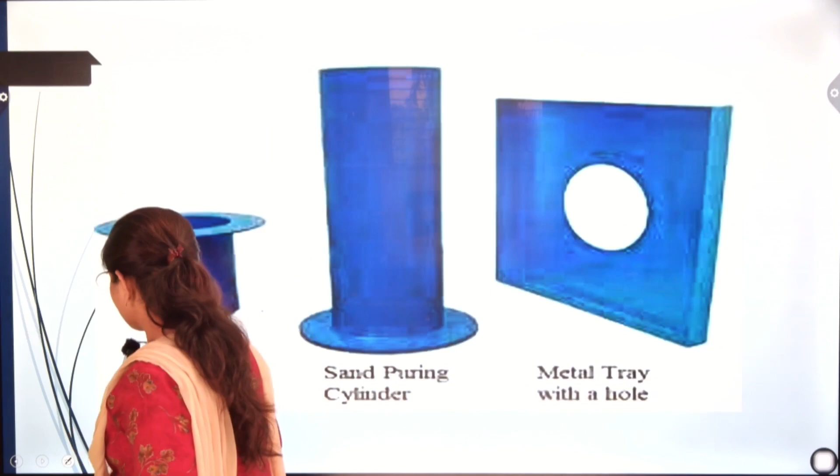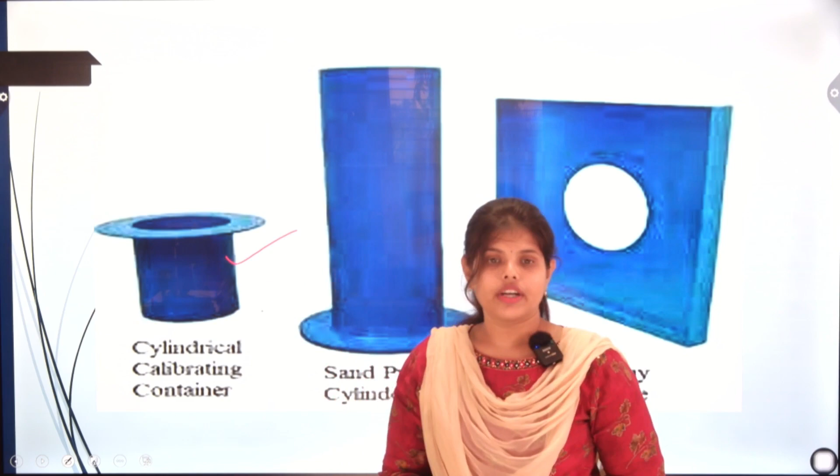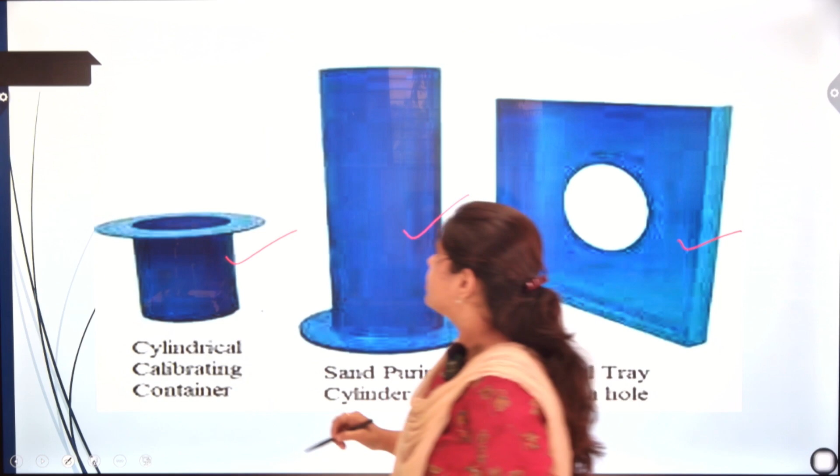To conduct sand replacement method, we need three apparatus. First is the cylindrical calibrating container. Another is the sand pouring cylinder. Next one is the metal tray with a hole. Also we need one spatula, and that's all. Now we will learn how to use these to conduct the sand replacement method.

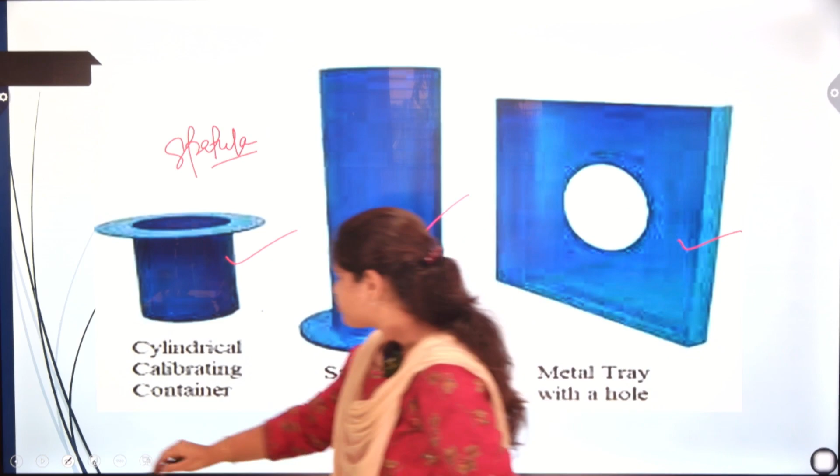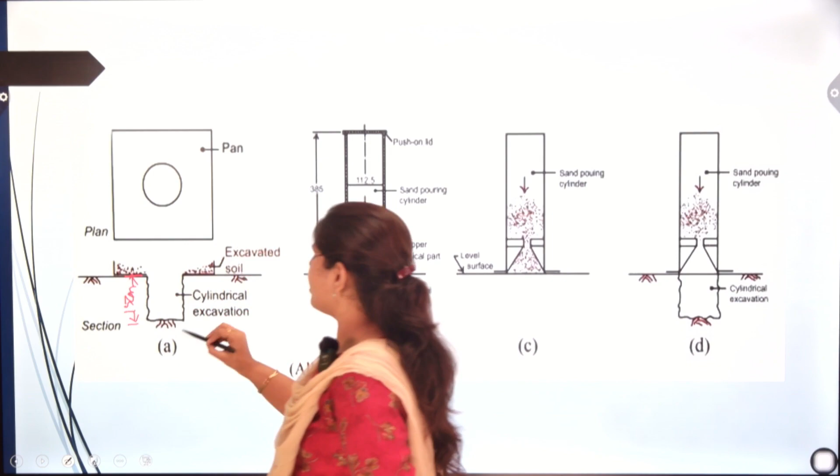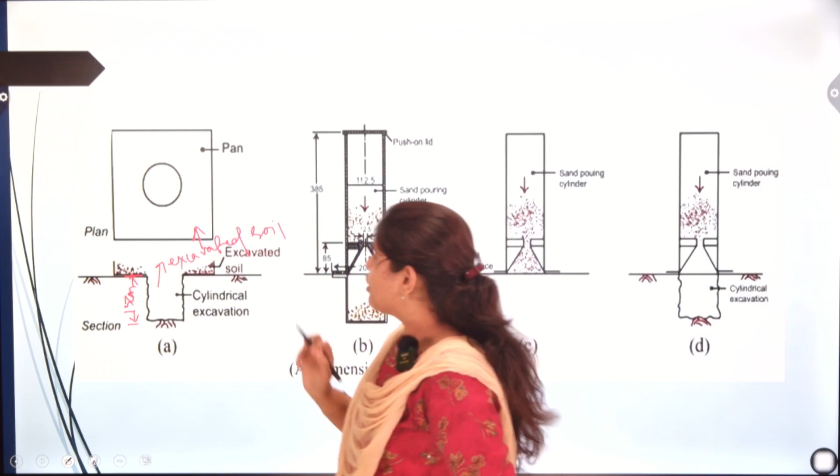First we will take the metallic plate and conduct soil excavation. This soil excavation will be done up to 15 centimeters. We will excavate this soil up to 15 centimeters, then take this excavated soil and put it into the metallic plate. Now this metallic plate will be filled with soil and we will take that as W2.

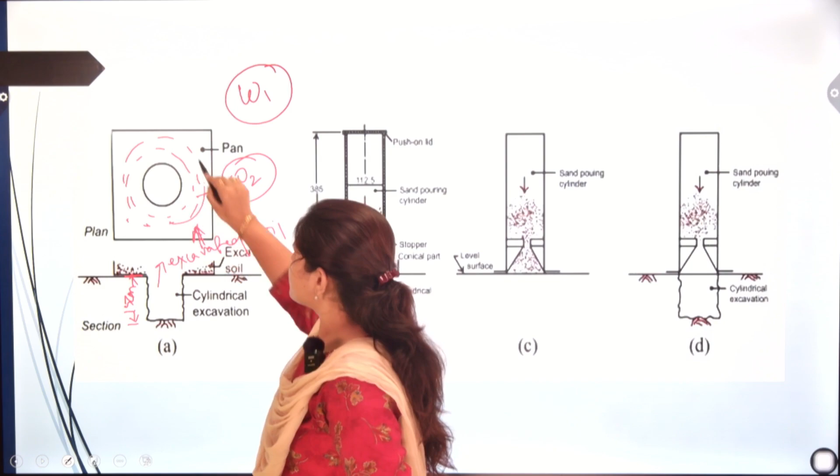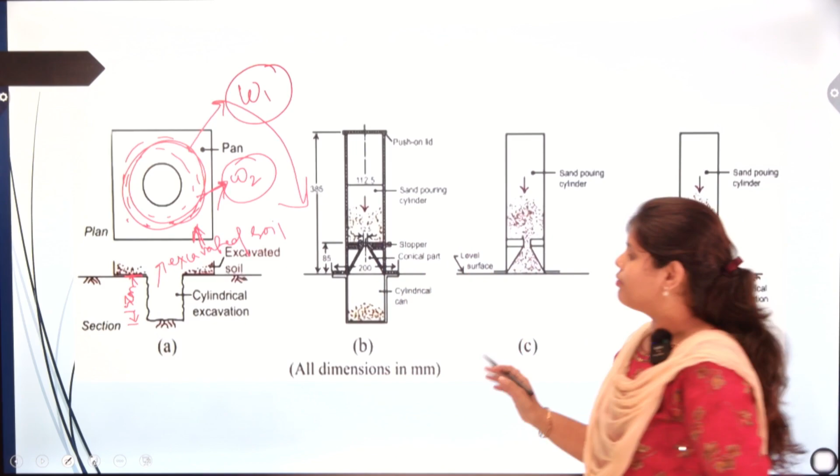So what is our W1? Till now we have taken the soil and weighed it, and the weight becomes W2. So to know W1, what we have here is one sand pouring cylinder.

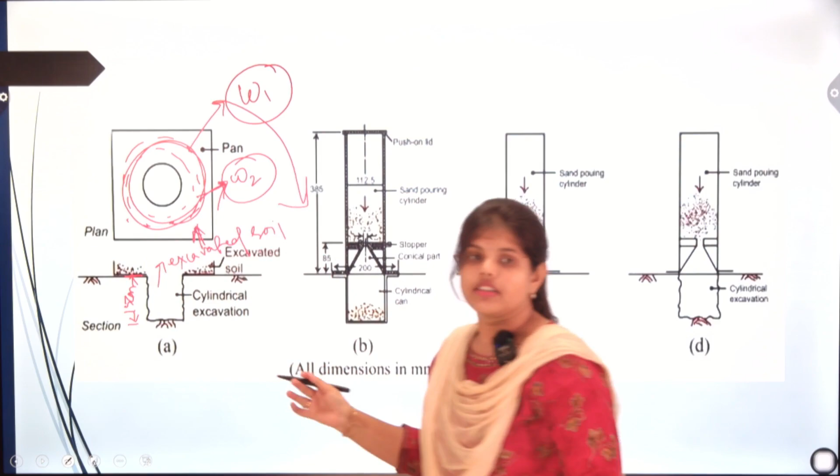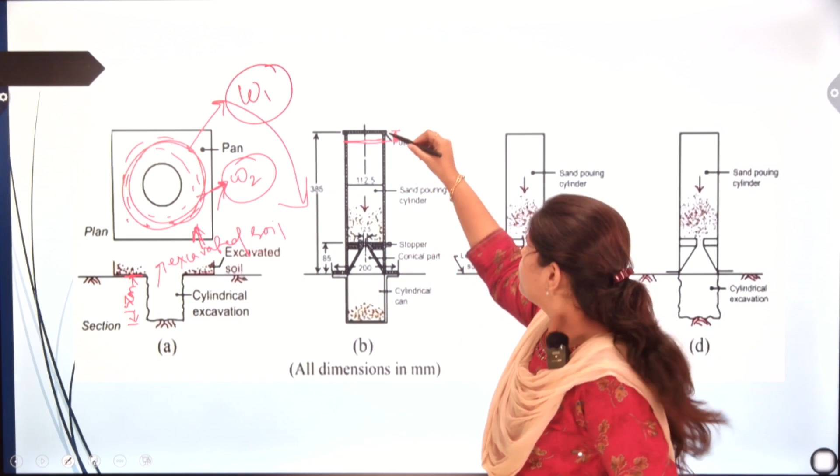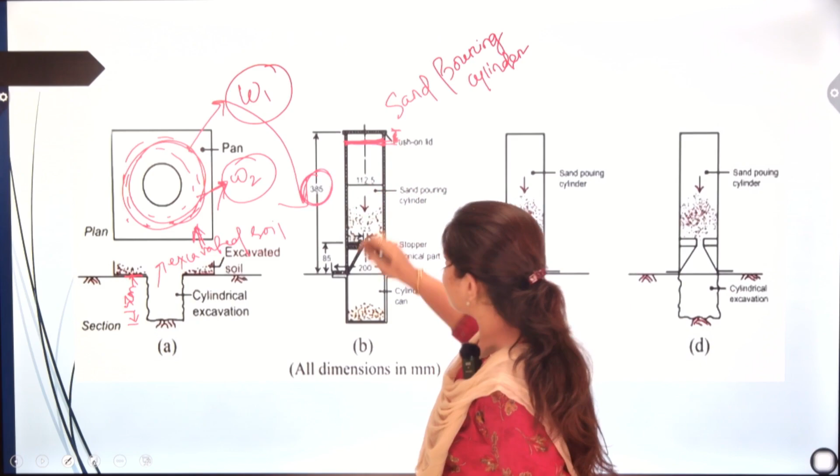Now we will take that sand pouring cylinder and fill it up to this length, so that this will be our 0.5 centimeter. We will fill the sand pouring cylinder up to 0.5 centimeter, and the total length is 385. Here all dimensions are in mm.

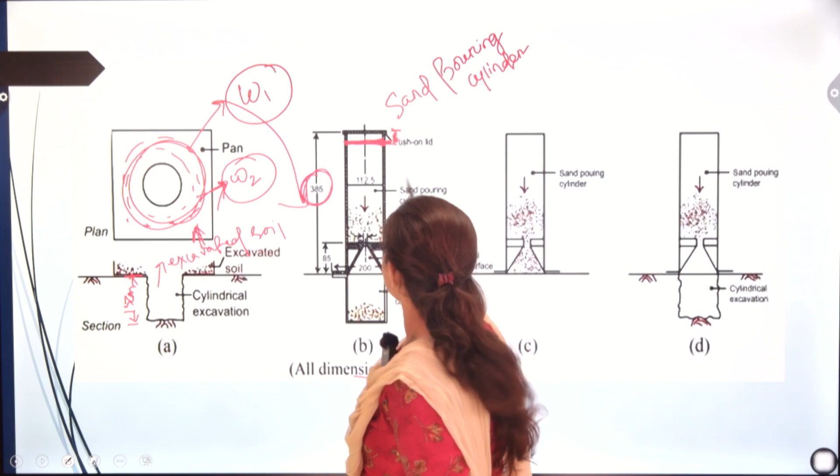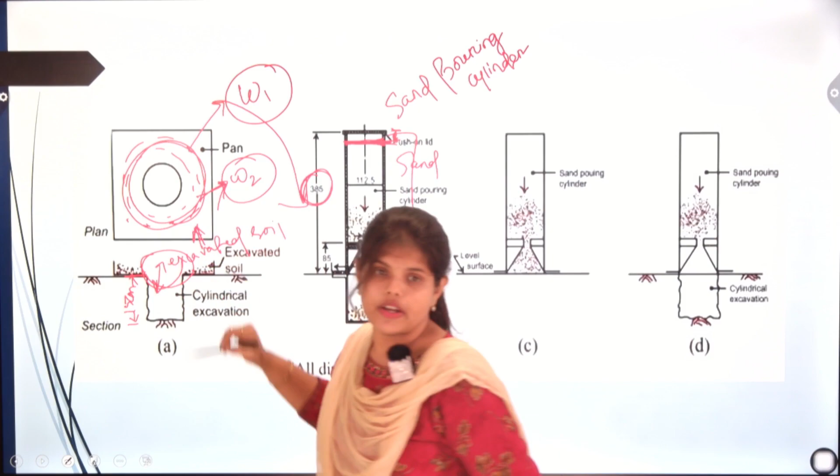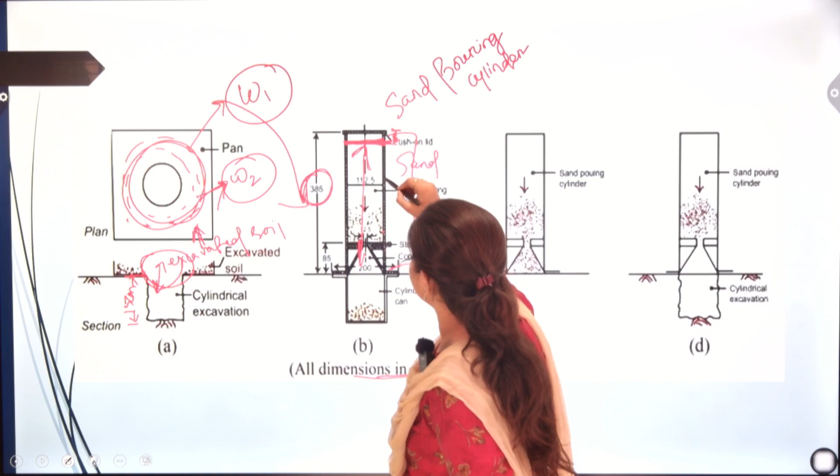This is filled with sand. So we will take this cylinder and put it into this excavated soil area. Now this is completely filled with our dry soil, or you can say dry sand.

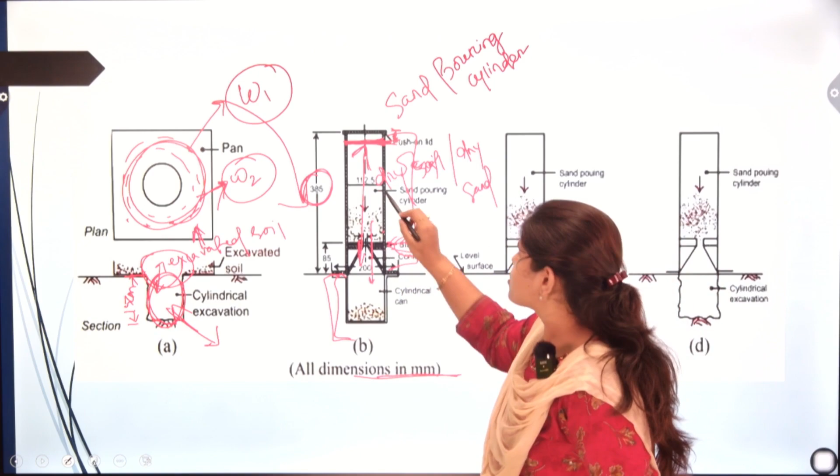Here we have one shutter. Now we can see this soil we have already taken has some moisture in it. So now it is completely vacant. Here we took the sand pouring cylinder and open this shutter, so that this vacancy will be filled by the soil present in the sand pouring cylinder. So this will fill in this manner.

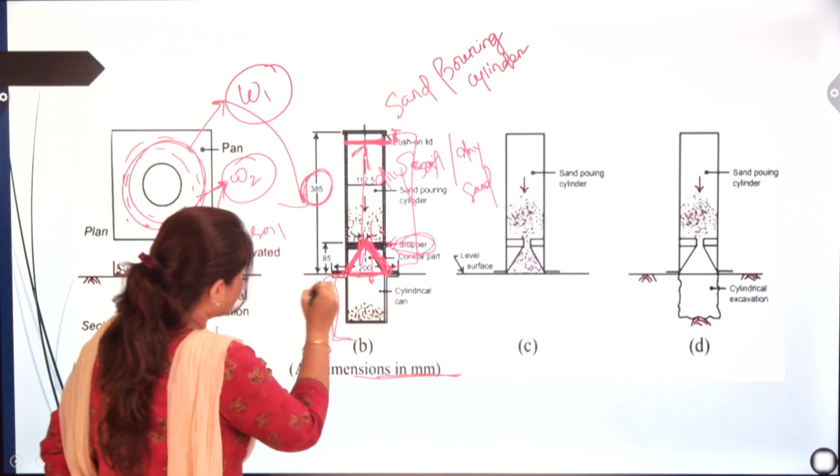This is because the sand pouring cylinder has a structure like a triangle here. So we have this excavated area soil in this manner. So here we got the soil here. Now take it as W3.

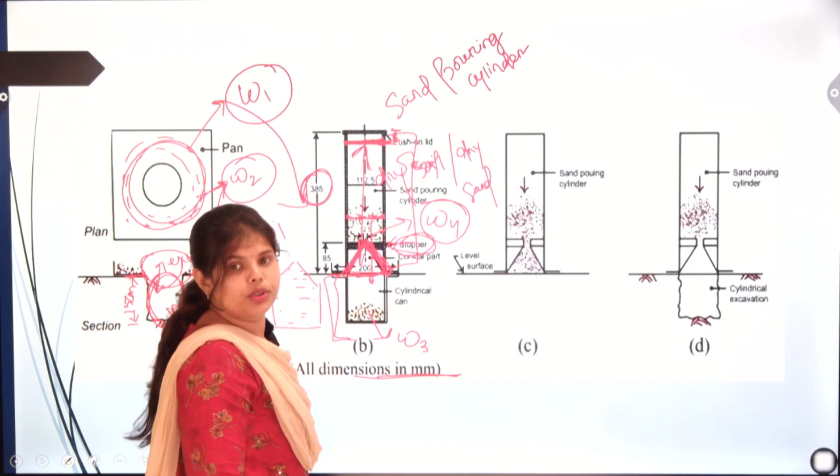Right, so here till now the soil, from these two, we will come to this level. So now this soil we name as W4. Here we have the soil up to W4, and this soil we will take as W cone. So here you can see the proper diagram: we have up to this length the sand, and it comes like this and will be filled in this manner, so that this surface will be a level surface.

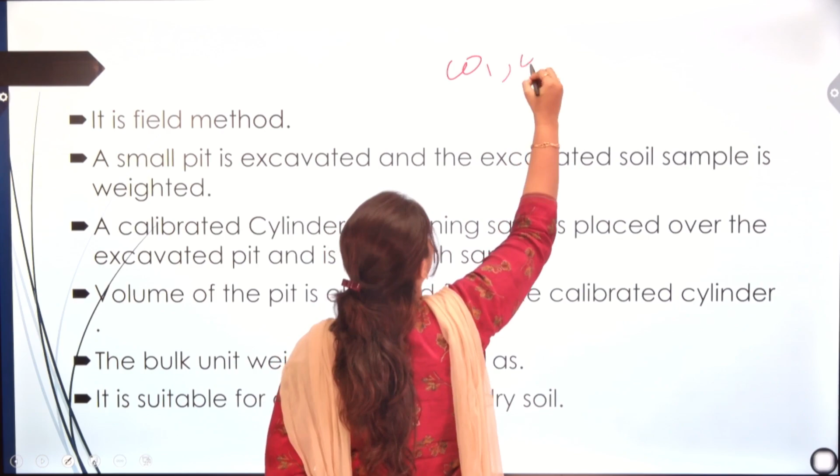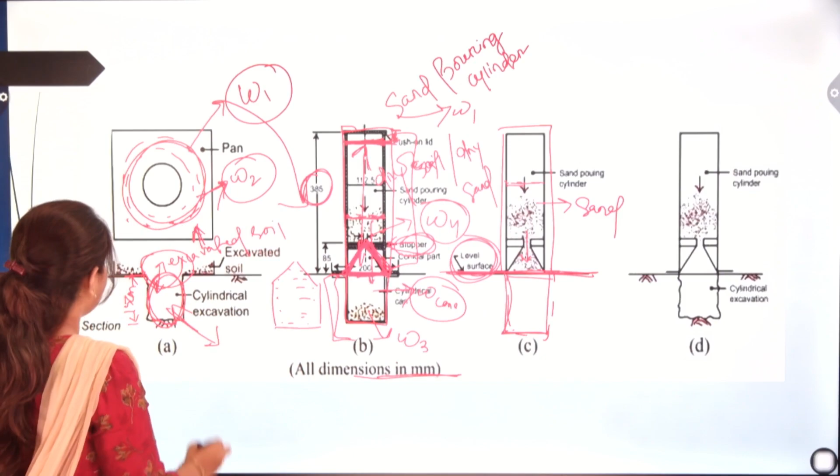Now comes to the calculation. Till now, here is the total procedure: we have W1, W2, W3, W4 and W cone. Again, first we have W1 here, the total sand pouring cylinder we take as W1. And here the soil we excavated, we take that and weigh it down in the weight process, so we have that as W2.

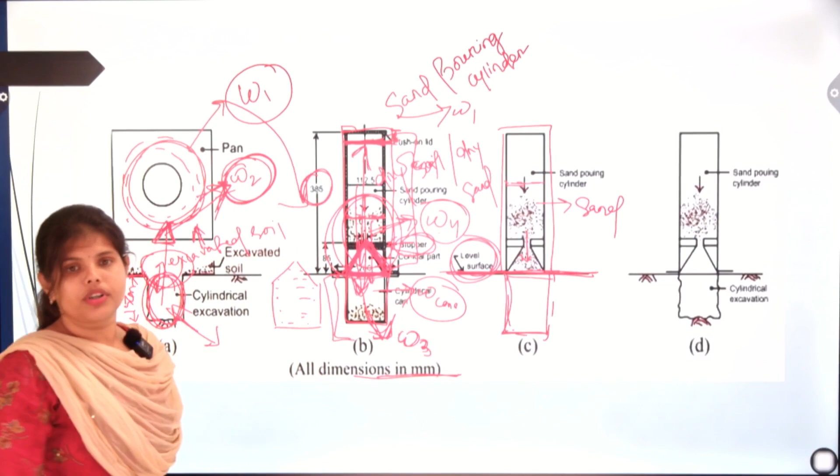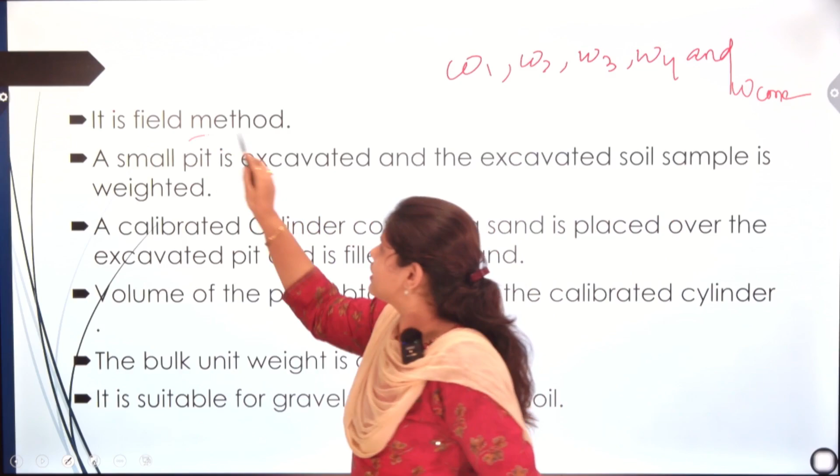Next, the soil that comes to this place, we will name that as W3. And also the soil left behind, that is W4. So here is the complete procedure. As I have already told, it is a field method - we excavate a small pit, take the excavated soil sample and weigh it. A calibrated cylinder containing sand is placed over the excavated pit and is filled with sand, as I have already told you, using the sand pouring cylinder.

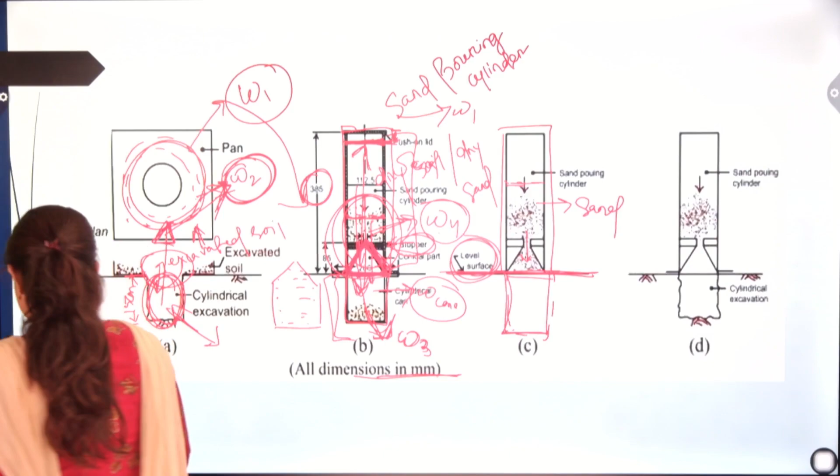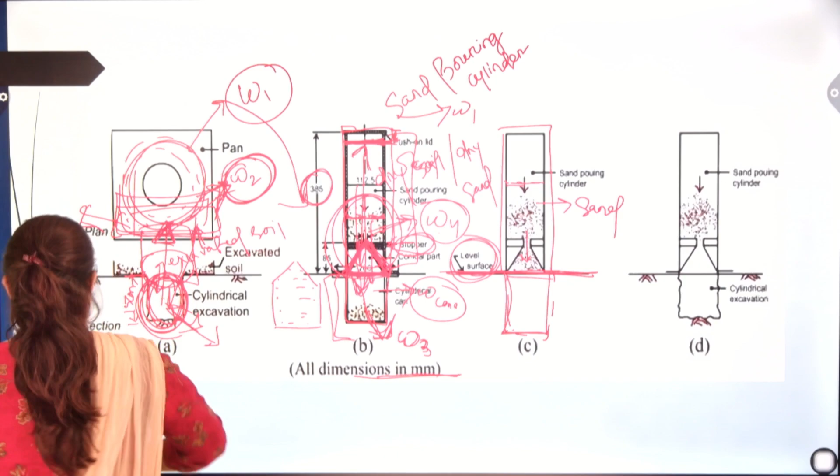The volume of pit is obtained from the calibrated cylinder, as per Archimedes principle. So here we calculated, taking the soil, the volume of soil will be equal with the area of this soil. So the volume we got here is equal with this.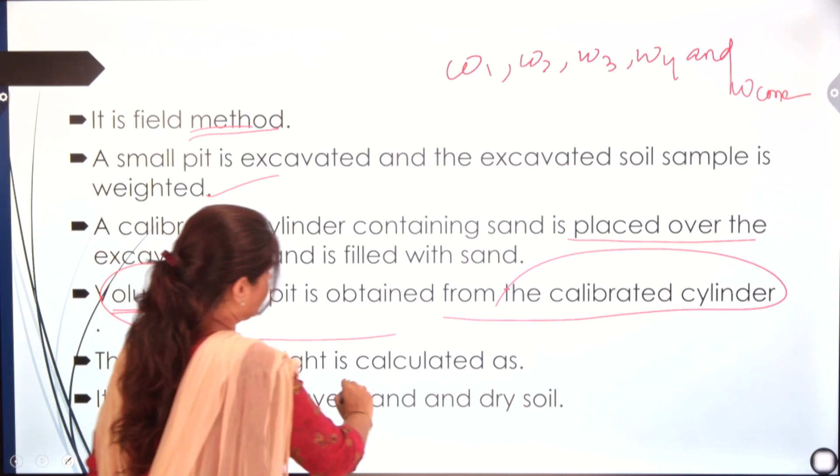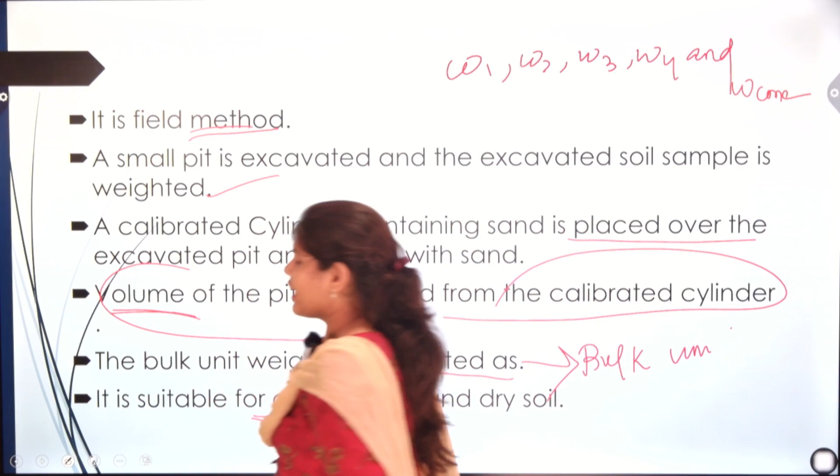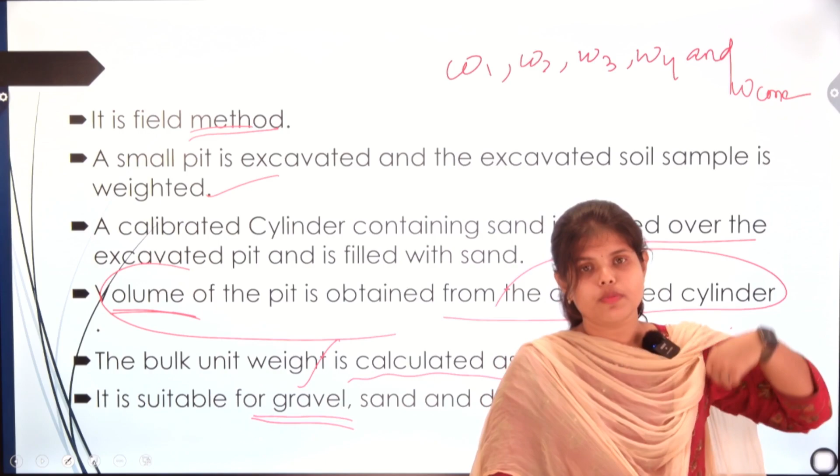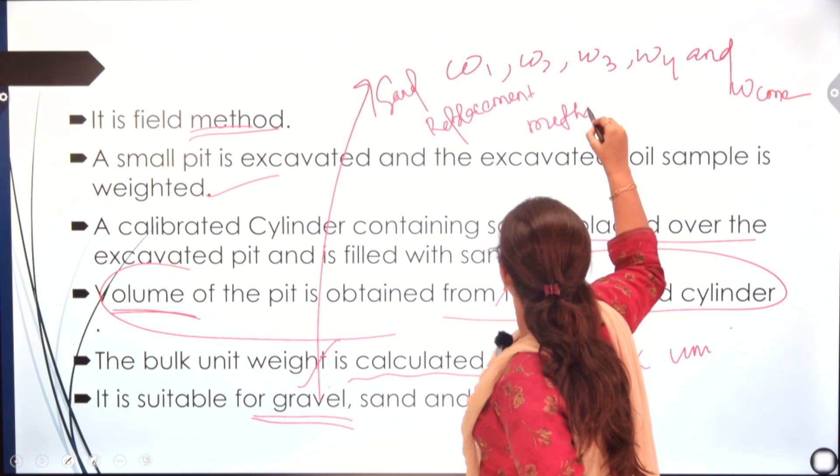So the bulk unit weight is calculated, and we will calculate now the bulk unit weight. The main and important part is we can conduct this process for gravel, sand and dry soil. Till now we have used 3 methods, but those methods we can conduct for gravelly sand and dry sand. But sand replacement method is the one and only method that we can conduct for gravelly soil.

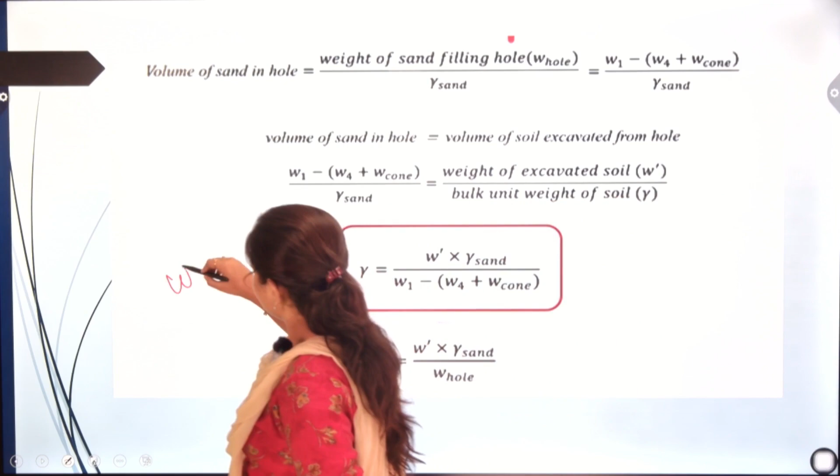So here is the whole calculation, as we already have W1, W2, W3, W4, but here in this calculation we only need W1 and W4. So to calculate volume of sand in hole, we need to find out the volume, as we already know gamma is our unit weight. To find out gamma, we need W and V: W is our weight of soil, V is our volume of soil.

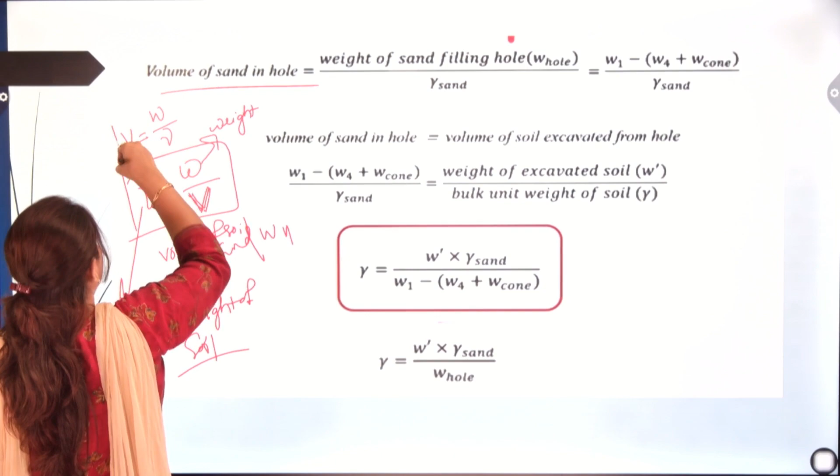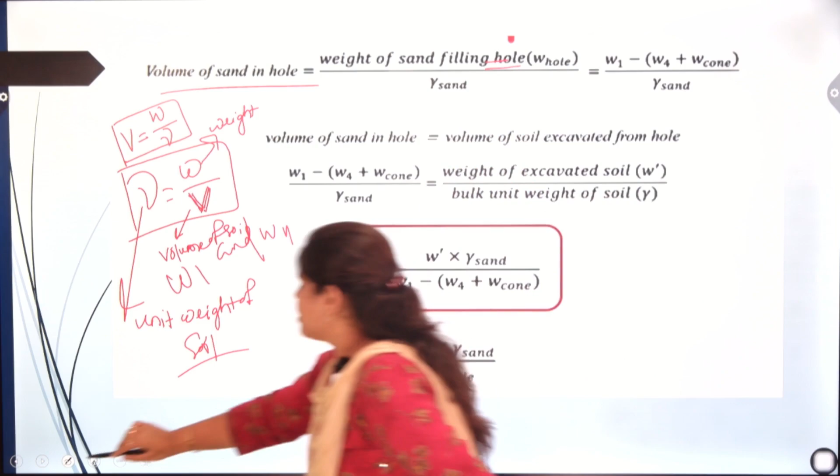So gamma is the unit weight of soil. Now, here we have the volume, we need to calculate the volume. So we can use the formula as W by gamma. So to find out the volume of sand, here we have weight of sand filling in hole. We need to find out this.

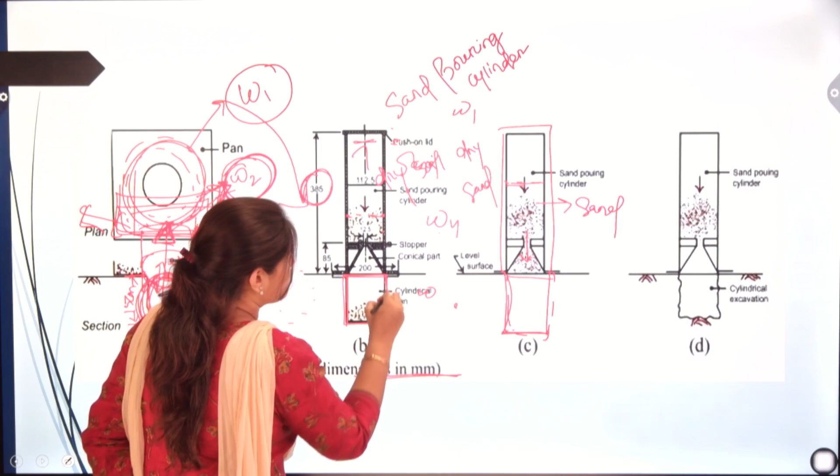We need to just find out this weight of soil and the volume of soil. So, to find out the volume, we have weight of sand filling hole. So, to find out that W hole, we can find out like W1 minus W4 plus W cone, right? Like here, we need to just find out this.

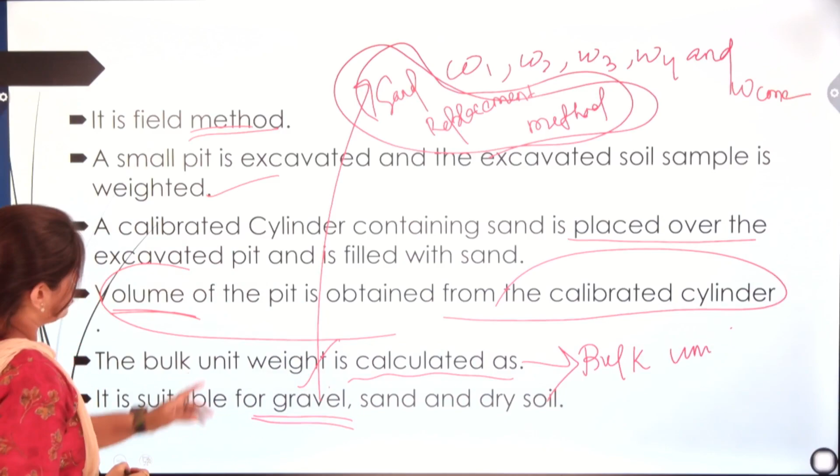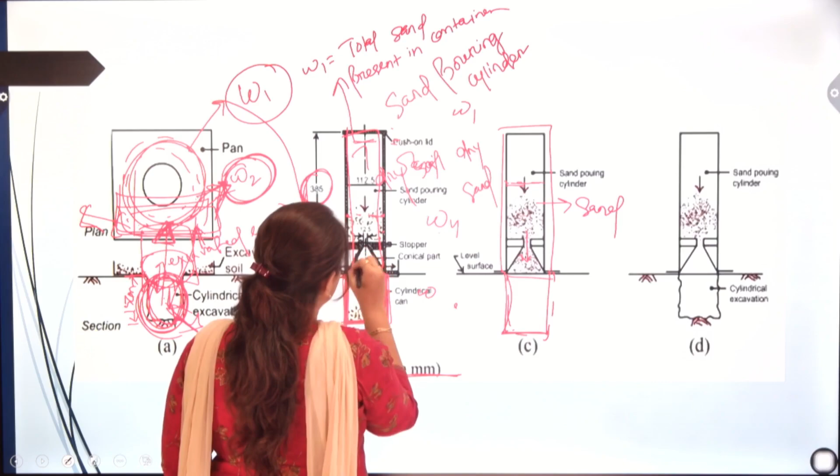So, W1 is what? W1 is the total sand present in container. Let's take the sand pouring cylinder as container. So, by subtracting this part and this part from W1, we can have this. How? First, this container is filled with sand, so we take that as W1.

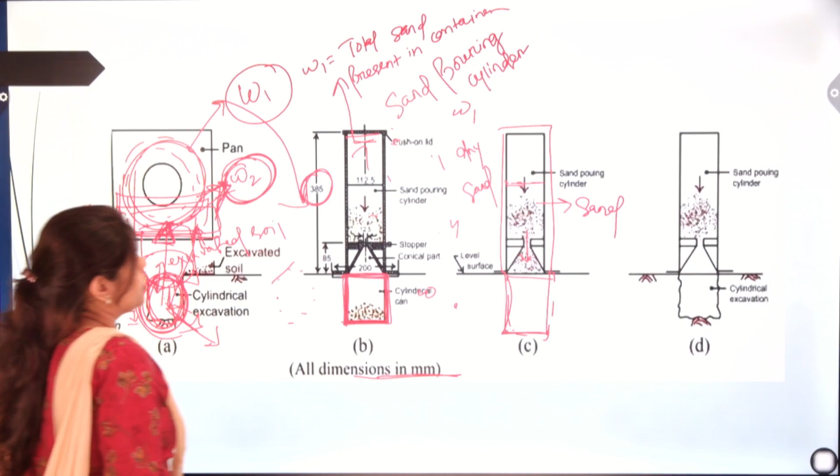When we open the shutter, what happens? The soil level comes from this to this, right? So, now W4 is here. W4 is the presence of soil in container after opening the shutter.

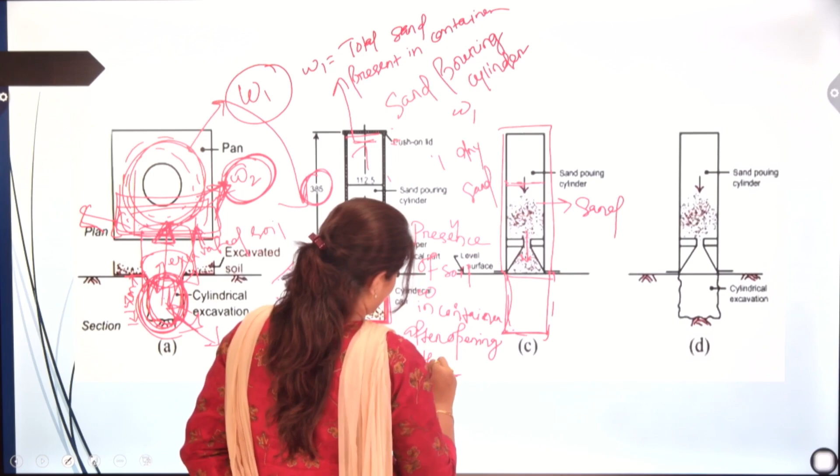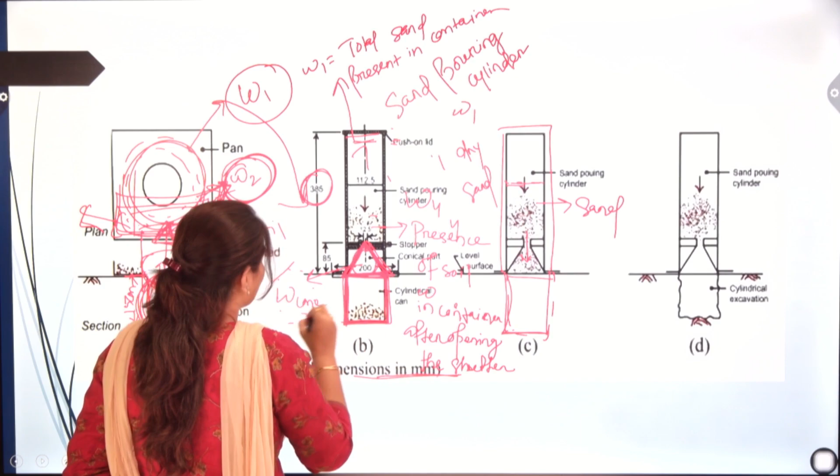So, now we have the W4 and the W cone is this part. As I have already told you, there will be some presence of soil, we take that as W cone. So, from subtracting W4 plus W cone from W1, we will have W hole, that is the presence of soil in hole. And by dividing it with gamma sand, we already have the unit weight of sand.

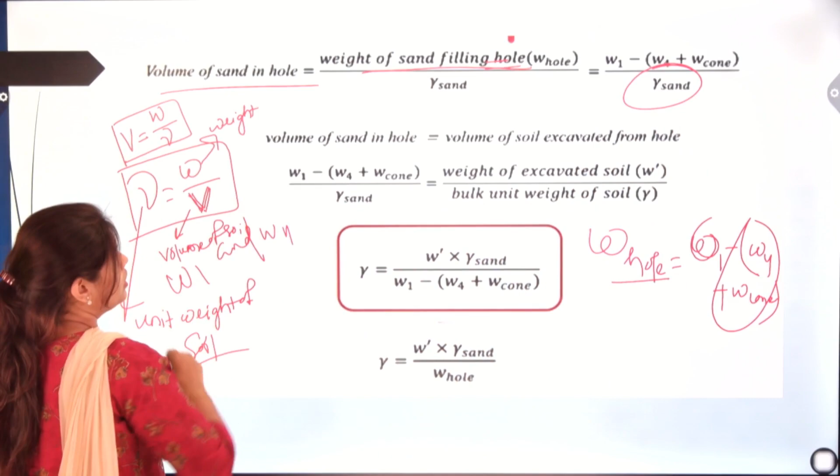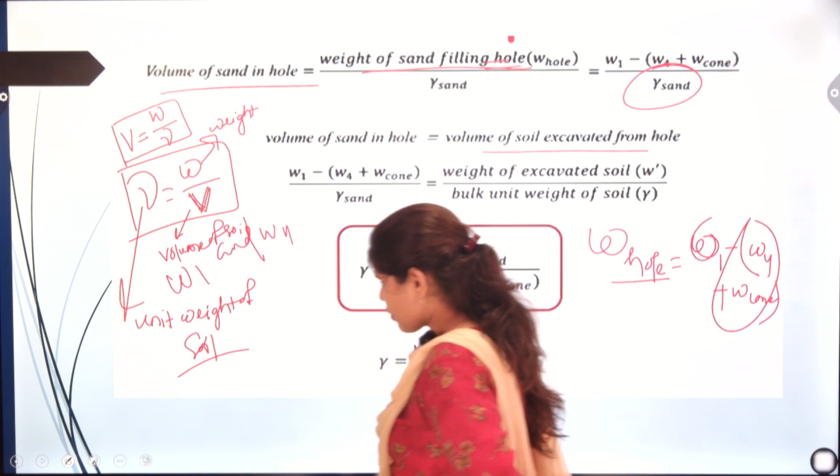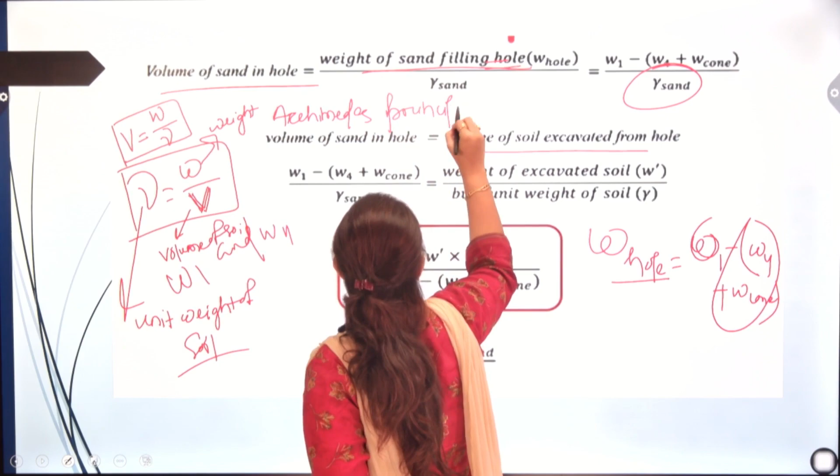So, now the volume of sand in hole will be equal to the volume of soil in excavated soil. From Archimedes principle, the volume of sand in hole will be equal to volume of soil excavated from hole.

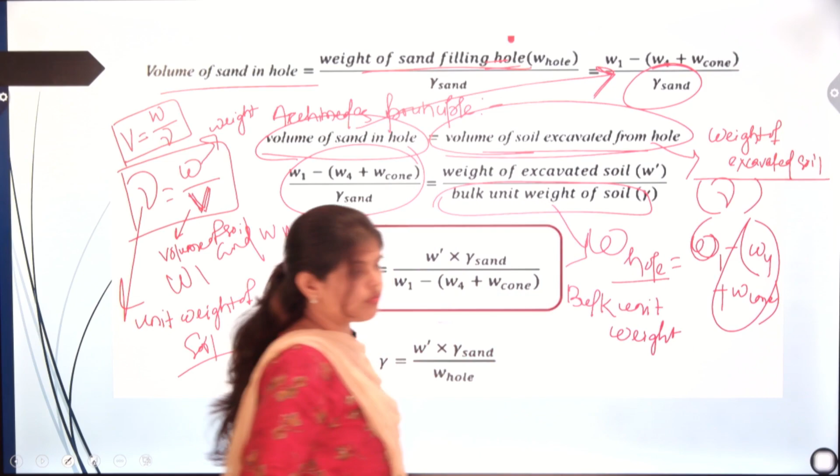Here we have the volume, so we can write the formula here. And the volume of soil excavated from hole will be weight of excavated soil upon gamma. So, this gamma will be our bulk unit weight.

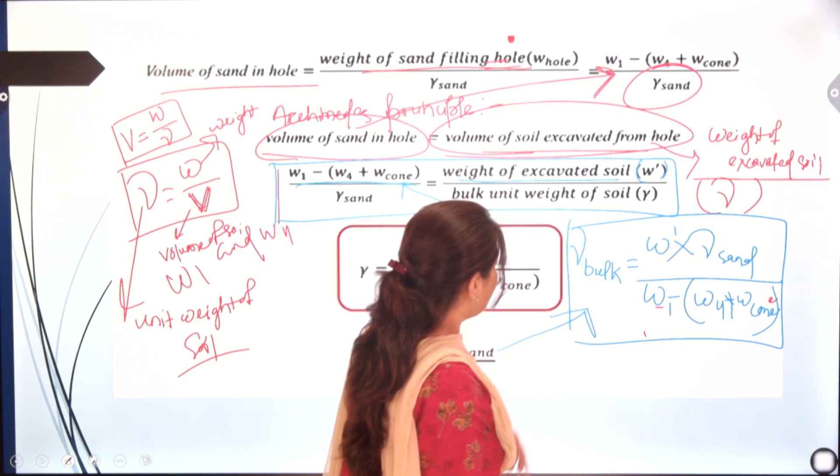Right? So, now from this whole equation, we can have the value of gamma bulk. So, our gamma bulk will be, we can take this to this part, and so here we take the weight of excavated soil as W dash. W dash into gamma sand upon this part. In this way, we have found out the gamma bulk or bulk unit weight.

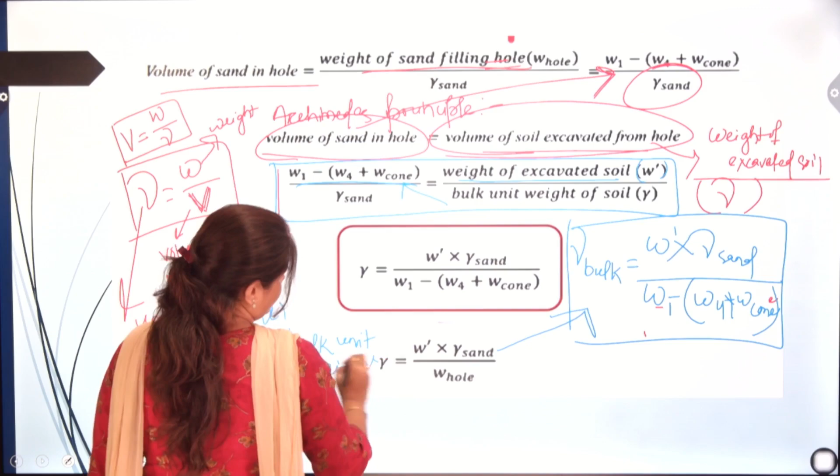So, in this way we can find out the unit weight of soil by using field process. So, if we need to conduct the process in the field, by using this formula lastly, we can find out the unit weight of soil. So, now we have done with the unit weight of soil by using 4 methods, and we learned about those 4 methods. So, thank you so much.